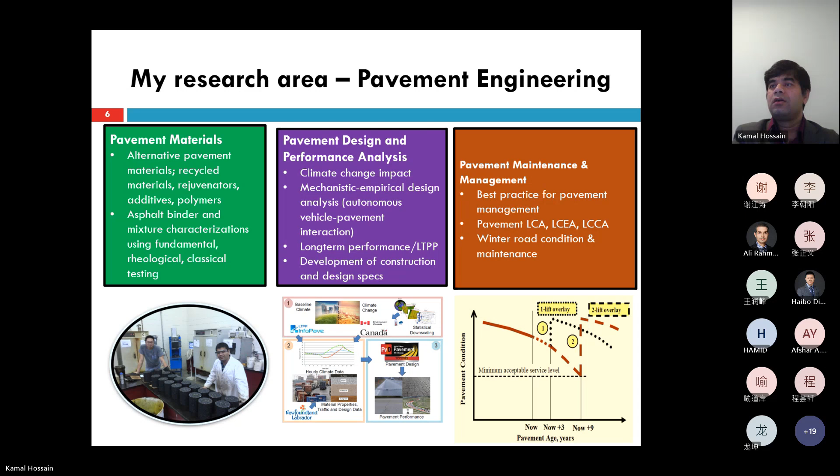This is my research team. There are now about 8 or 9 graduate students working on different subtopics. The project that we'll talk about, as I said, we finished in 2022, but all the publications occurred in 2023. The title is Climate Change Impact on Pavement Materials and Design. It's a PhD project. Dr. Surya Swarna completed this project. He's now a postdoctoral researcher at Rowan University in New Jersey, USA. I will give a very high-level summary of this 4-year project that Dr. Surya Swarna completed during his PhD in our research group.

We all know that the climate that we see nowadays or in recent years is different than in the past. We do not need to prove that climate is changing. As we work in the science and engineering field, we know that we see much more heavy rain precipitation in some areas, or very severe rainstorms that we did not see in the past, or more hot days, warmer days.

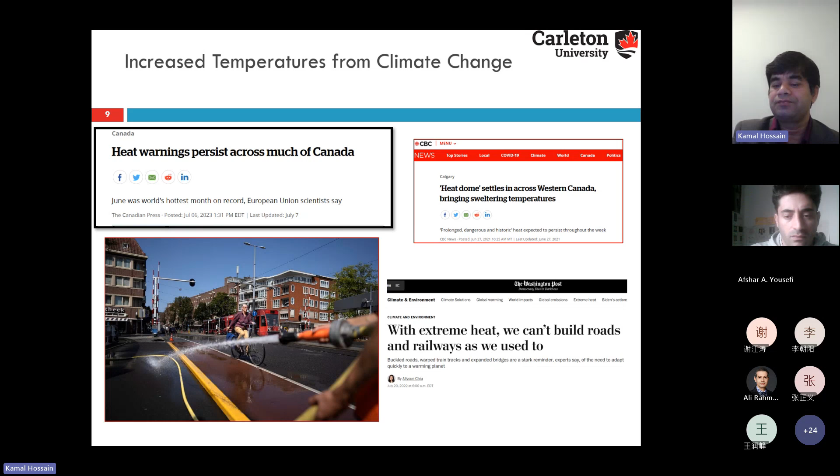So the point is that due to change in climate, we see much hotter and warmer days in recent years than we used to see in the past. And from the rainstorm perspective, we also see very heavy rainstorms, and more rainstorms in a year than we used to see in the past.

This is a snapshot from a heavy rainstorm event in British Columbia. We had big rainstorms in British Columbia in 2021. Hundreds of kilometers of highways flooded, destabilized by the water that came from the mountain and hilly areas. So the point is, due to climate change, we see more warm and hot days, and also more rain precipitation and water that our pavements experience, and there is no doubt about it.

In the US, because the temperature changed from past years, Professor Shane Underwood, now a professor at North Carolina State University in the US, before that a professor at Arizona State University, did this study while he was in Arizona. In 2017, he published this paper in Nature.

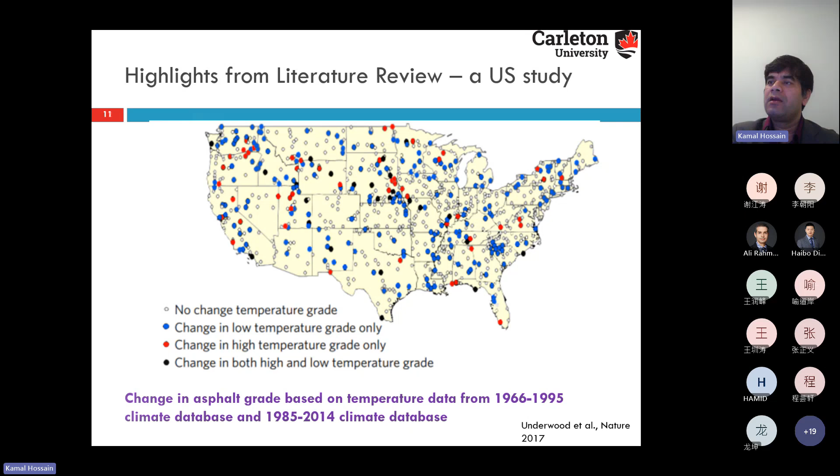Now, in that study, Professor Underwood also predicted how the temperature will change considering different climate change scenarios and models. Based on 3 scenarios, he predicted that the temperature will also change significantly. So what it means is we need to change the grade, considering future climate change, for high temperature and low temperature.

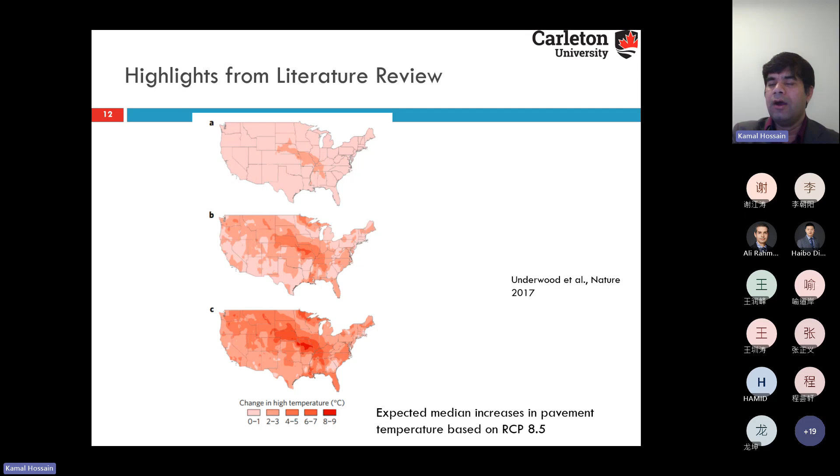I also reviewed some European work. For example, this is an Italian study. Again, a very similar study; they wanted to see changes in the binder grade in high temperature and low temperature between 2013 and 2033 using a climate change model. You can see in graph A, which gives a clearer picture, the high temperature grade changing 1 grade up.

As you know, PG grade binders are like 52, 64, so every 6 degrees we change one PG grade. So in this location in Italy, they found that the high temperature grade needs to change. And in some locations, they also found the low temperature grade needs to be changed, between 2013 and 2033 using the climate change model.

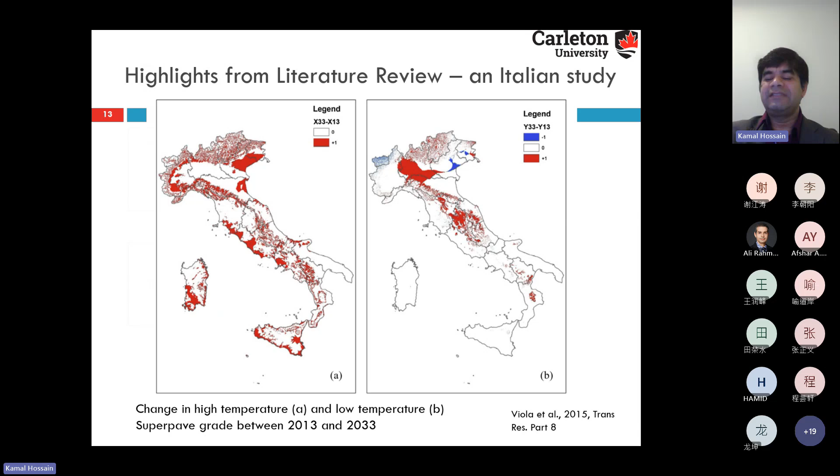So this gives a context to understand the impact of climate change in Canada. Our objective was to determine and quantify the climate change impact on pavement performance in Canada in various locations, especially in major cities. Then to assess the new binder grade, in other words, to determine the change needed in binder grade because of the temperature rise due to climate change.

During this exercise, we also learned that the pavement temperature model we use in Canada for determining the binder grade is the US model. Many of you probably know there is the SHRP model, the LTPP model. We found that model is really not that appropriate for Canada because of the latitude difference, and our climate is a little different from the US climate. So we addressed that problem by developing a pavement temperature model for Canada using Canada's latitude and climate data.

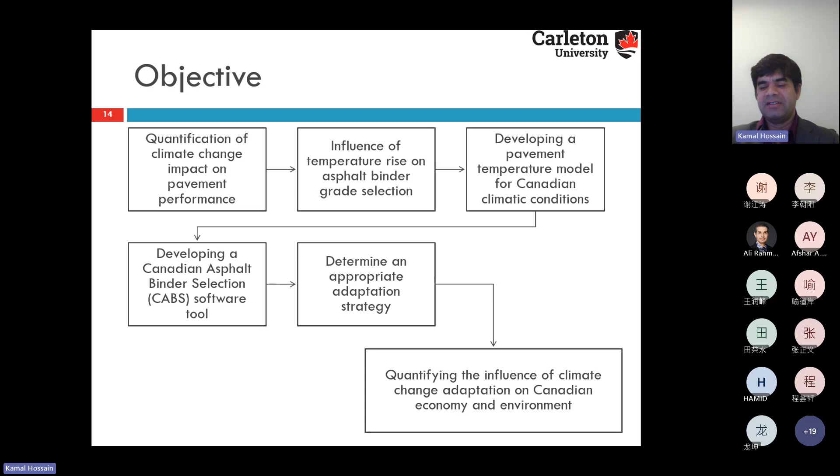And as we saw that climate change has an impact on pavement performance, we also came up with some adaptation strategies to mitigate the climate change impact. We also determined the impact on the economy and environment of those adaptation strategies if we adopt the design or materials, and if we do nothing. We also did that analysis in this work. Again, it's a very comprehensive 4-year research project, a PhD project.

So as you know, that PhD project has very systematic methods. It has basically 3 parts. In the first part, we basically determine and quantify the climate change impact on the pavement performance.

So what we did, we collected the historical data, or created the baseline data for climate from Environment Canada website using data from 1980 to 2010. So we took the temperature data and precipitation data.

As you may know, in the government database, they do not record the hourly data in many cases. They record daily average high temperature, average low temperature, average amount of rain, average amount of snow. But for pavement design and analysis using mechanistic method, we need the hourly data.

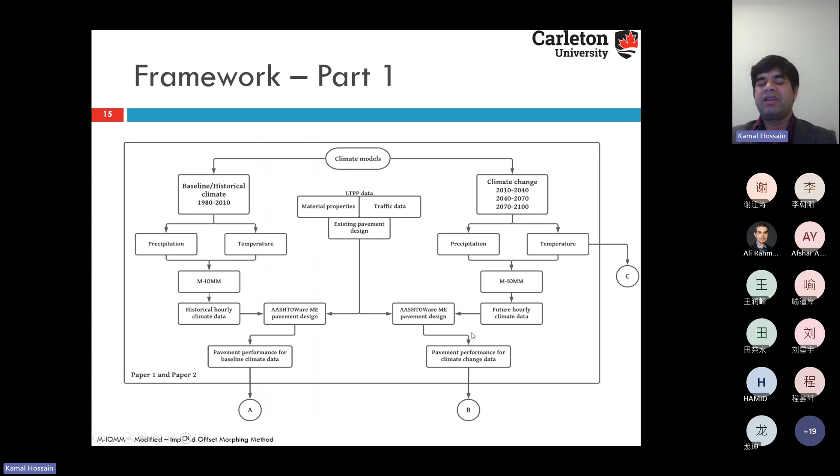So again, using those climate change prediction models, we determine the future temperature and future precipitation pattern, the daily average, and then we use the statistical technique to determine hourly climate data. Again, then we use the AASHTOWare Mechanistic-Empirical design software to determine the pavement performance.

So, as I said, it has 3 parts. In part 2, what we did to realize those objectives: so now we know the hourly temperature and hourly precipitation for different time horizons from the previous part.

So we plugged in those data into the SHRP pavement temperature model. Some of you know Strategic Highway Research Program also has a pavement model, and the LTPP pavement temperature model, very similar to that. And then the EICM model, Enhanced Integrated Climate Model, that is in the ME program itself.

So we used these 3 models to come up with the binder grade to see how they are different - the existing 3 models that Canadian pavement designers, pavement engineers, binder designers, asphalt engineers use - and we compared. We saw they are different because they are for US climate and US latitude, not for Canadian context.

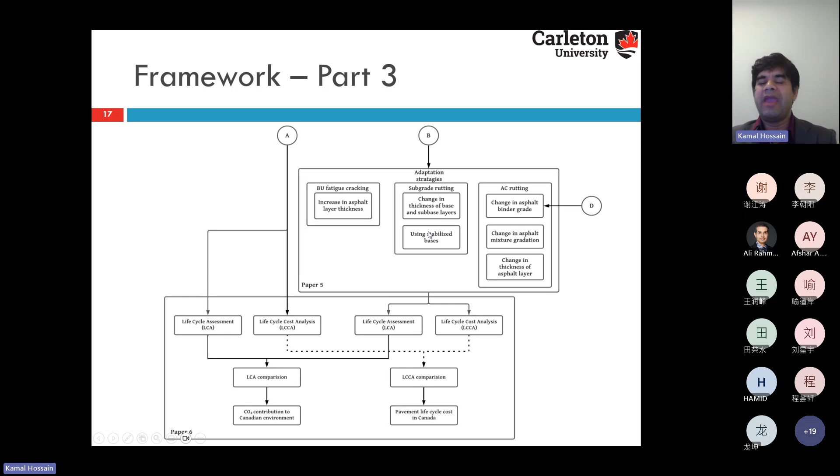Use the stabilized base, okay? Don't just use the aggregate layer. Use some stabilizer, cement or asphalt.

And in some regions, like in the Toronto area, we saw that there will be more rutting in the asphalt concrete layer. So we propose to change the binder grade, change the high temperature grade, or bump up one grade, high temperature grade, or change the asphalt mix grade. That was also a solution we found, or change the thickness of the asphalt layer.

So we basically prescribed some solutions based on the potential climate scenarios, okay, climate change scenarios. So you have to do it to reduce the issues in the pavement. So of course it comes with cost.

So we also looked at environmental issues if you don't do it. So we did the LCA, life cycle assessment, and life cycle cost analysis for the do-nothing case, and if you change the pavement design or pavement materials for this kind of issue. And we did a comparison for the cost and the environmental emission for different cities.

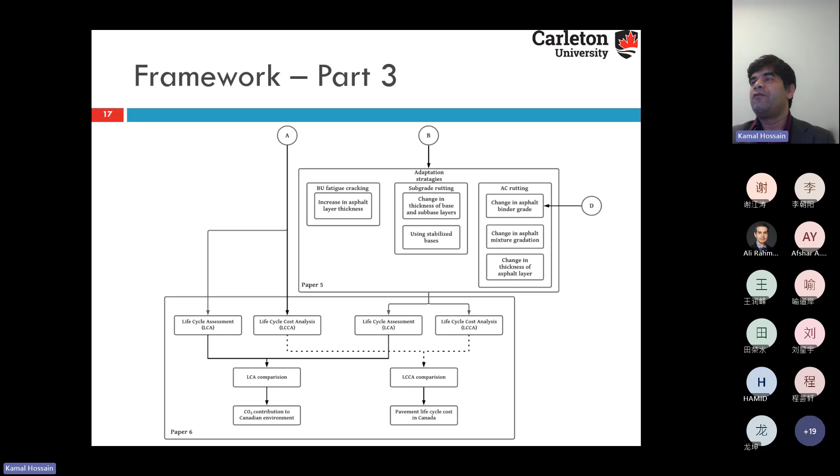You need also the material properties, okay, then you need the pavement structural information. So it has the pavement response model in it, okay, that calculates stress, strain, and deflection. And based on that, it calculates the future rutting, fatigue cracking, thermal cracking, and roughness. The software will give you output of the distresses based on the input that you plug into the software.

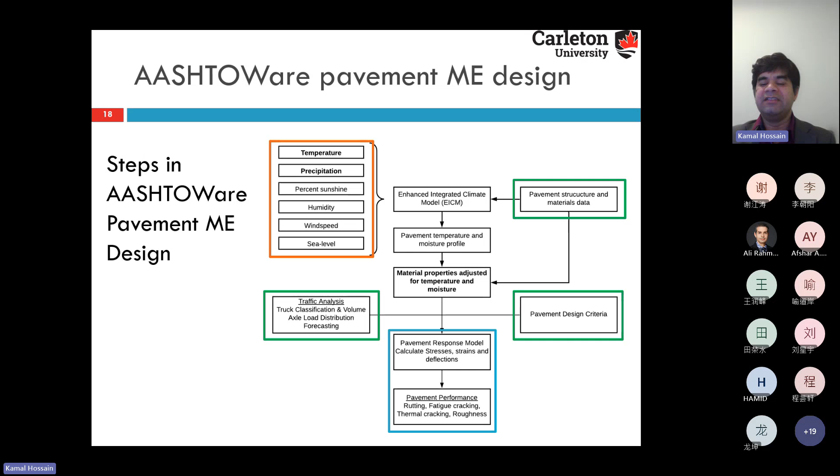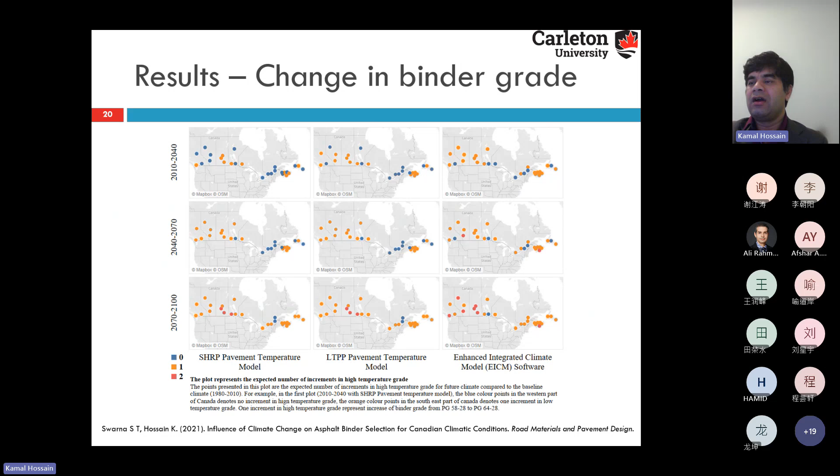So, if you remember, I said these are the existing three modeling techniques, three models: the SHRP model, LTPP model, and EICM model. These models are US models, and we found that it doesn't make sense to us to use that US model for Canadian environment, weather, and latitude. So we used our own model, the CPT model.

So this is the Canada-wide model, but if we go to the previous slide, we also thought Canada is so large - as you know, it's the second largest country in the world. So it's better we should have a regional model based on the similarity in pattern of temperature, rain, and the freezing index, number of days that undergo below 0 degrees.

Based on these three parameters, we also developed some regional models. We called it cluster - cluster 1, cluster 2, cluster 3 - based on the similarity in pattern of the climate variables. So we also developed regional models for predicting pavement temperature. It exists in this paper, published in RMPD.

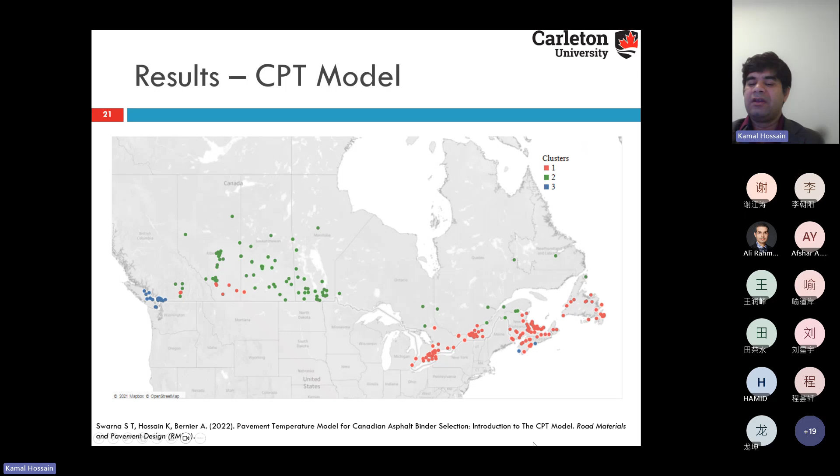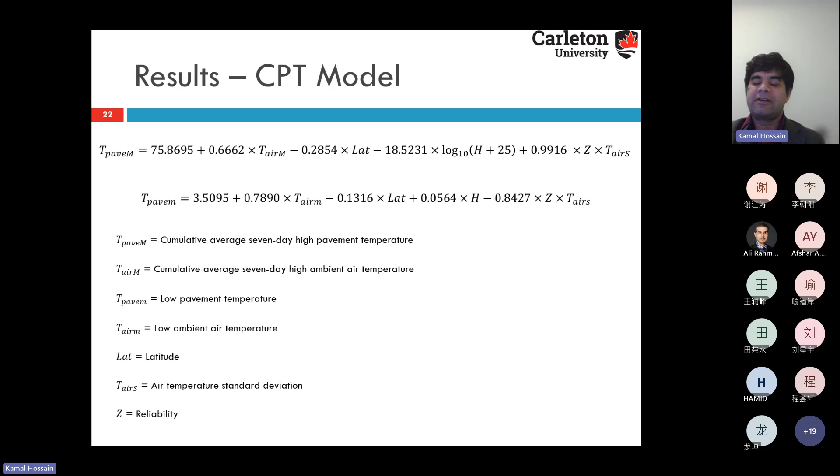So this graph shows the statistical validity of the models. The red section is the high pavement temperature prediction model statistical result, and the blue section is the low pavement temperature prediction model statistical result. The first panel is the entire Canada model, Canada-wide model, and cluster 1, cluster 2 is the regional model.

So just one indicator quickly - as you probably know, R-square is a good indicator to understand the quality of the prediction power of the regression models. So we got very high R-square values based on so many observations and so much testing, validating. Our R-square value is pretty high for all these models.

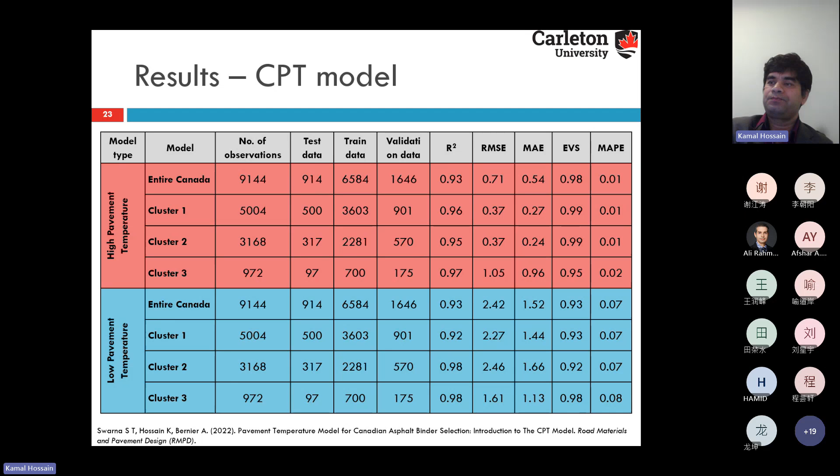And of course that is the statistical model. We wanted to also validate with the field observations. We collected data from the field, from different parts of the country, including Newfoundland, different Canadian provinces, Saskatchewan, British Columbia, Ontario. We found that the model predicted value and field measured value are also very close, for high temperature and low temperature, both areas.

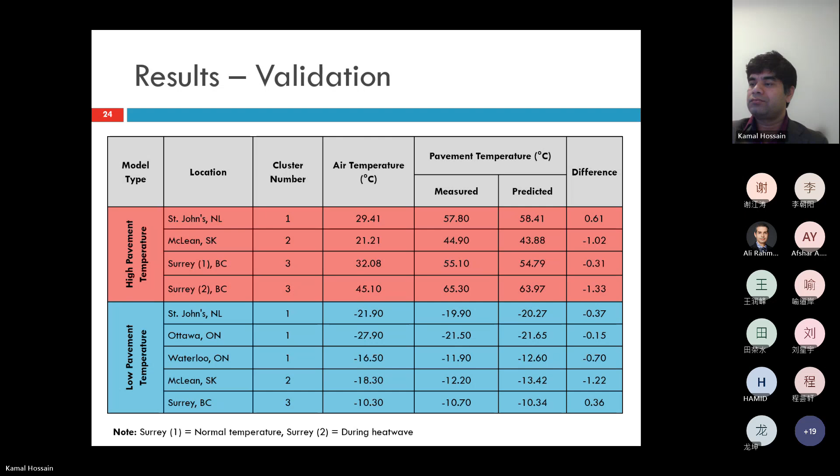So using this new climate database, we also developed an application tool, as I said, to come up with the new binder grade needed for different Canadian cities, using the existing models - SHRP model, LTPP model, and the EICM model, the American models basically - and we also used our new CPT model, Canadian Pavement Temperature model, to come up with the binder grade, so people can use this application if they wish to.

So this video clip shows how this software tool works to come up with the new binder grade. Okay, so I'll play this video. Ali, you can tell me if you don't see the video and if you don't listen to the video presentation.

Sure, Kamal. Yes. Okay. So, we called this software tool CABS, Canadian Asphalt Binder Selection Tool.

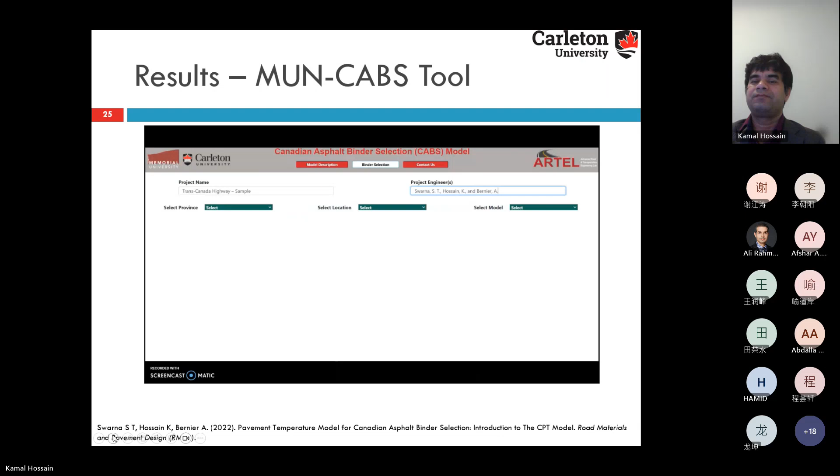One audience member, Behruz, mentioned that you need to change the voice input to the laptop screen. Perhaps this is the solution. Okay, let me try. Can you maybe tell me how to do that? On settings, I think on more settings on your Teams screen, the more section. If you click the more section, there is audio settings. You need to share your speaker with the audience. I'm in audio settings. It's okay, Behruz, no problem.

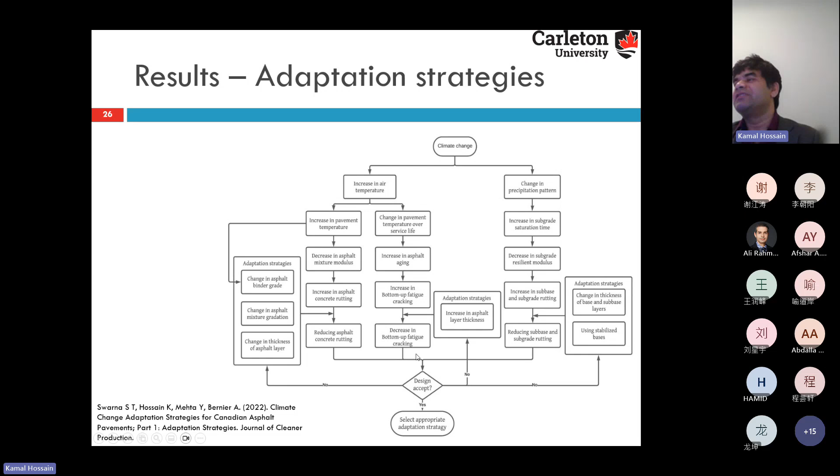So these are the solutions. Because of climate change, two main things are happening from a pavement perspective: an increase in temperature and a change in the precipitation pattern. The increase in temperature increases pavement temperature, which decreases the mixture modulus, and that increases asphalt rutting. So to reduce this rutting, we propose many things.

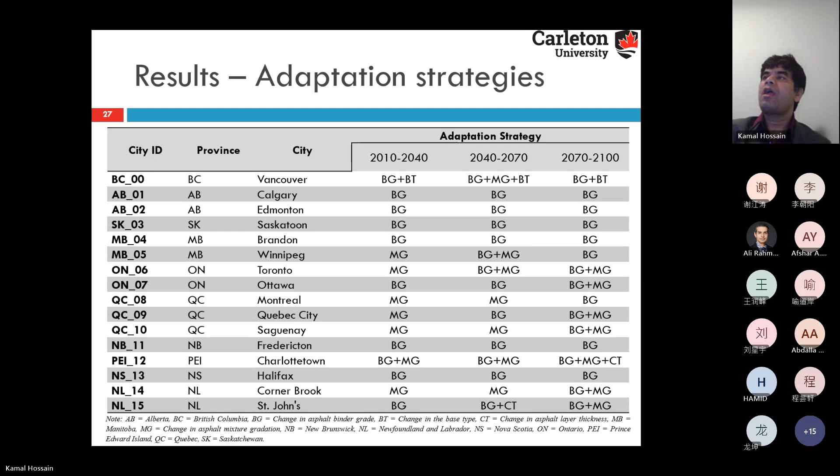So now if you adopt this or if you don't do anything, what will happen? If you don't do anything, you will have more emissions over the life of the project. That's what we found in summary. And if you change your pavement design or material, from an environmental perspective there will be overall less emission over the life cycle in different regions in Canada. Why? If you don't change, there will be a lot of issues in the pavement, so there will be a lot of emissions during the use phase.

If you change, of course, there will be more construction activity. In the beginning, there will be more emission compared to if you don't do anything. But over the life of the project, overall you will be saving emission if you change now rather than if you wait. Okay, what pavement distress will occur doesn't matter to us.

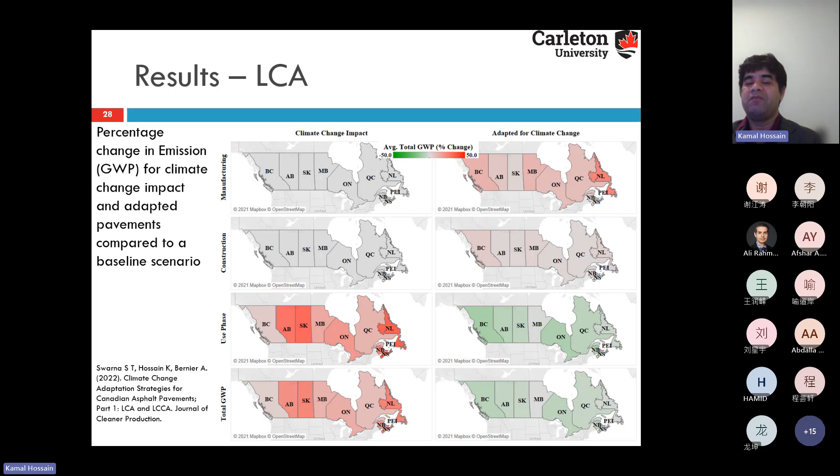From the cost point of view, we observed a very similar trend: if you do not do anything, you do not have any cost in the beginning, for agency and for user. But if you do change in the beginning, yes, there will be cost, but overall you will be saving money over the life of the project, especially for the user cost, which will be very high because of the emission and fuel consumption driving on the bad road or road with distresses.

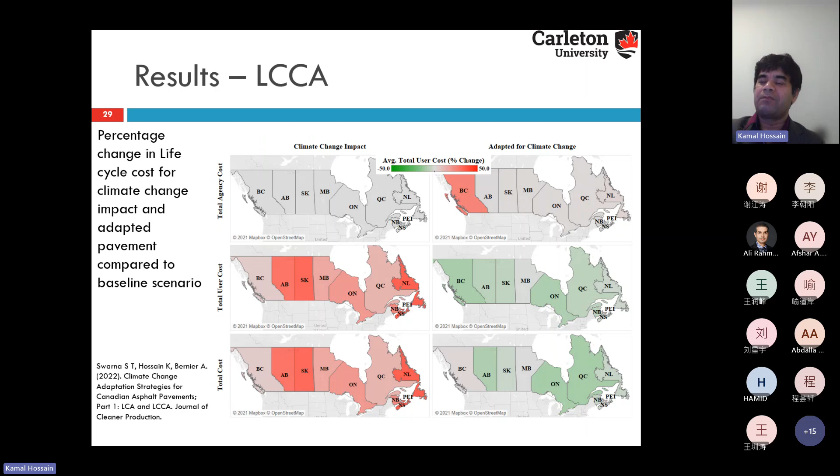So again, each of the works that you're seeing, one slide is kind of one paper. All are published, so I cannot go into the whole detail. But if you are interested, you can go to our website or ResearchGate or Google Scholar. You will find all the papers that we published from this project. Seven papers actually we published from this work.

And we also proposed climate change adaptation strategies to mitigate the issues. And we also did life cycle cost analysis and life cycle environmental analysis for different adaptation strategies or material changes needed to mitigate climate change. Again, this work was done mainly by Dr. Surya Swarna. I am just presenting this work on his behalf as his supervisor, and we also got a lot of support from our other group members.